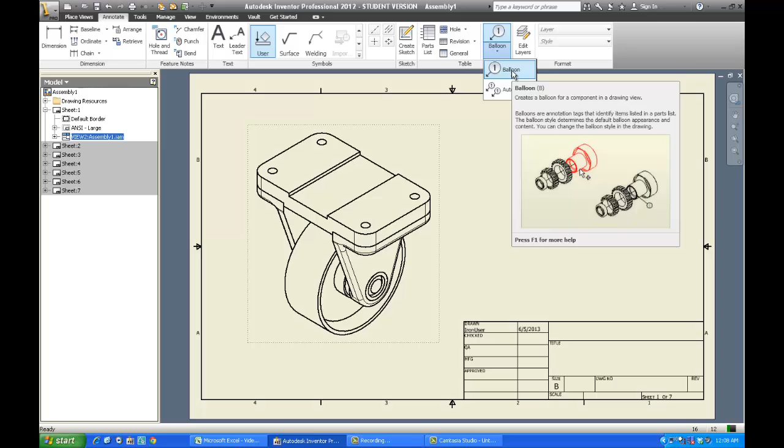Now to do this I need to put some balloons on here that label all the parts. So I'm going to simply pick my balloon tool over here. Now I can auto balloon it or I can balloon it manually. Okay, I'm going to go with ballooning manually for this one. I'm going to select the parts because there's only one view on here.

I'm going to select the parts in the order that I want them to be seen, and I'm going to pull them out. Now I can actually go in here and place them, continue, and drop them all off that way. But we're going to undo this. That's the hard way to do it.

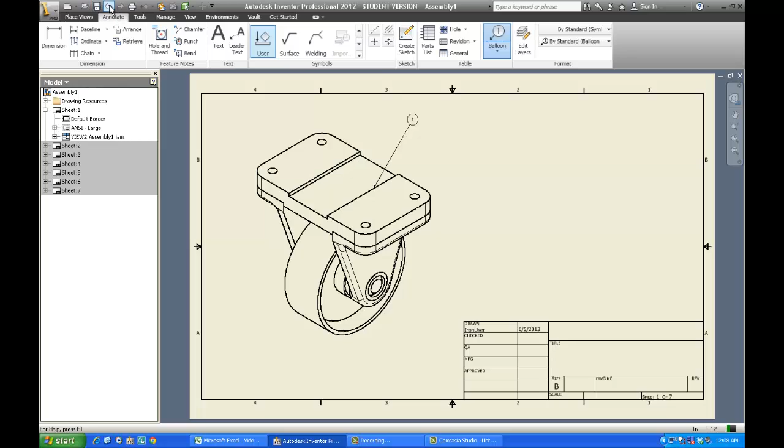We can also use the auto ballooning tool, and it says select view, so I select the view I want, and then I can add or remove components. Okay, in this case I'm going to make sure I get all the components on here. Got to have the bushings, the axle, the wheel, the other side. Everything should be selected at this point.

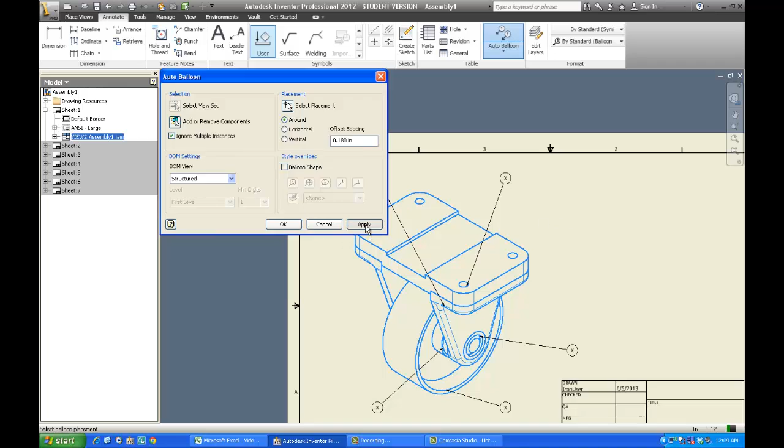Now select placement. I can go around, horizontal, or vertical. Now when I say placement, horizontal runs them out in a straight row, vertical, a straight row vertically. I prefer to do around, that way I can manipulate things and have them in a more logical location as I edit it. So I'm going to simply do that and go apply. Okay, and then I'm done with this part.

Now if I look at this, see what I mean about some of these not making sense about where they place the call out? Well, I'm going to take this and I'm going to place it right in the middle. Now one thing you need to be aware of, zoom in on this, if it points at the part, that means it's touching the edge of it. If it's a dot, it is right on the part.

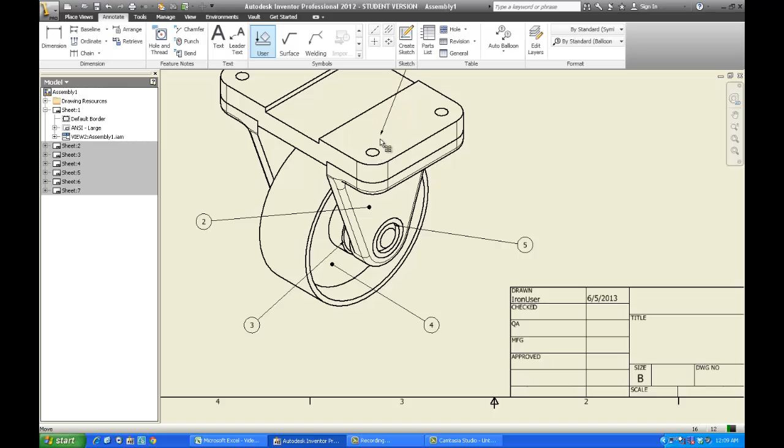So in this case we want to change some of these around so they actually touch the part, so it's very obvious what they are, and not, say, like this one, it looks like it's pointing at a hole. No, we want to show the actual part. So as I put that in there, I've got them going around counterclockwise, 1, 2, 3, 4, 5.

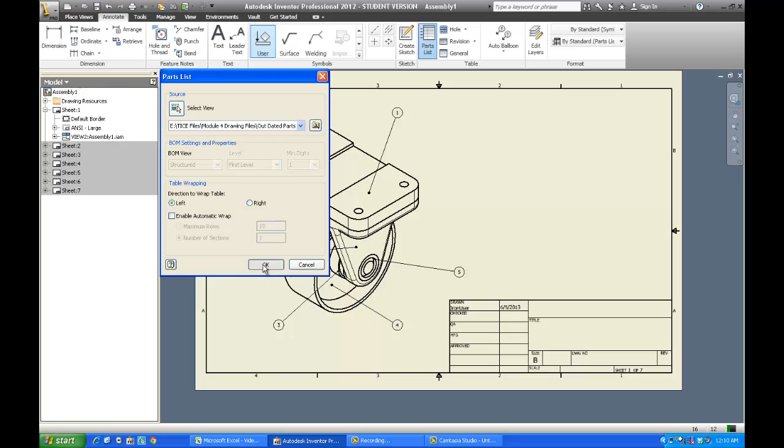Okay, now once I've got that done, I can create a parts list very easily. Select view. Well, I've only got one view to work from, so I select my view. Now it's going to work basically off that information right there. Wrap text left to right, enable automatic wrap, da da da. Okay, I'm just going to drag it up here, drop it off.

Okay, there's my parts. I have a top plate, part number 4, part number 2, part number 5, and part number 3. And I have 2 of part number 4. Well, part number 4 in this case happens to be labeled as part number 2, which is my supports. Part number 3, which is right here, is my brass bushing that you can hardly see. So we can put all that in.

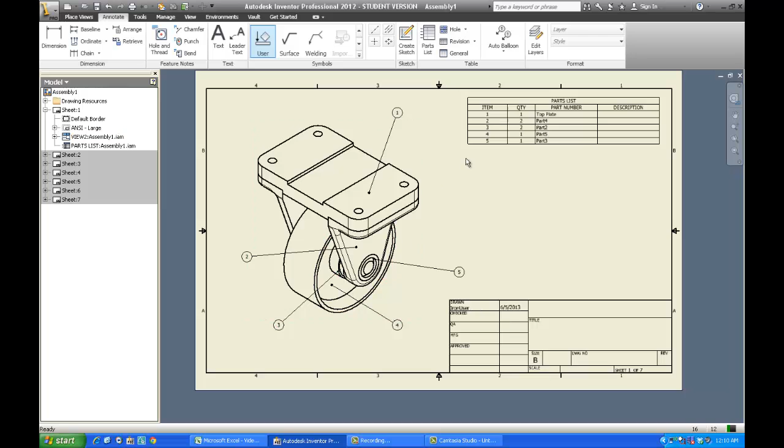Now if I want to, let's zoom in on this guy. I can go in and edit my parts. I can change them. You said part number 4 is actually my wheel support. And part 3 is actually my brass bushing. Once I type those in, apply, okay, there they are.

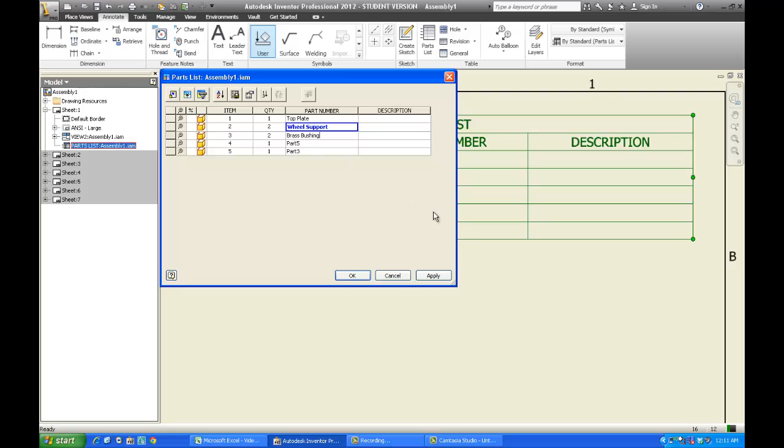Now do we see a problem here? Yeah, everything should be uppercase, so we'd need to go in and fix that. But there's my list, all of it's right there on it. That's as easy as it is to make a bill of material.